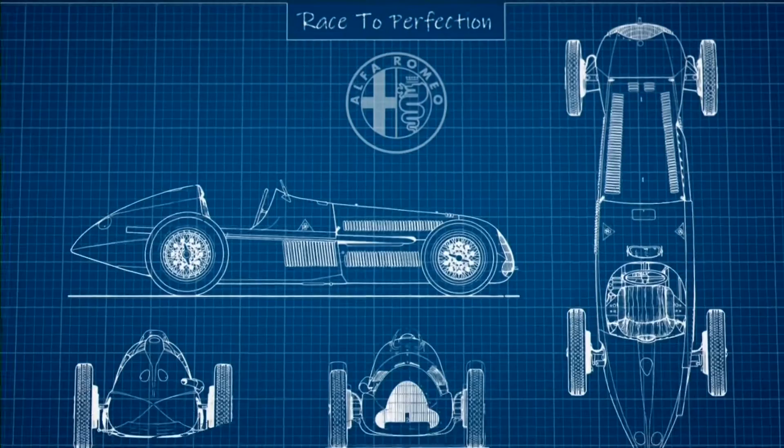From Italy, we have the Alfa team, almost certain winners, indisputable post-war champions of motor racing, and in the hands of some of Europe's finest drivers, they have swept home to victory after victory.

All the 50s cars, the Alfas and Maseratis of that period, were iconic for me. Just the shape - I mean, we all had an Alfetta dinky toy, and I just loved the cars from that era. Those early cars had no comprehension of aerodynamics, so they were very much mechanical devices.

And some strange rules. I mean, we have a minimum weight limit - they had a maximum weight limit, which seems crazy.

The people that drew those cars, the draftsmen if you like, had a real empathy for shape. The grills weren't just openings with some mesh in them - they were always interesting, and they fitted the rest of the car. The shape of the tail didn't really have to be like that from an aerodynamic point of view. So I find that period fascinating.

I often think with Italian Grand Prix cars, they all owe a bit to Bernini, the sculptor. Something about Italian Grand Prix cars - they always look different, and they are different. They are works of art in themselves.

There is colour everywhere as the cars stand wheel to wheel awaiting the warming up lap. The red of Italy, blue of France, yellow of Belgium, green of Britain - they all blend beneath the fluttering flags of competing nations to give an air of pageantry unequalled in any sport. Having made the fastest time in practice, the Alfa drivers were all in the front line.

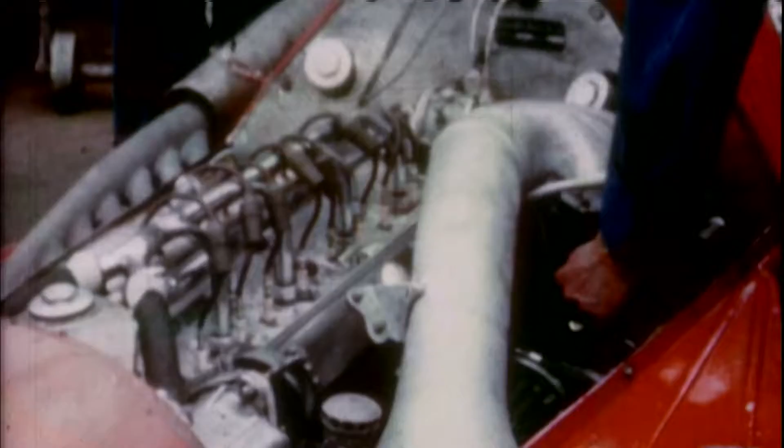It's a remarkable bit of kit. It ended up getting 420 horsepower out of 1.5 litres, and there was nothing that would stop it.

Watch the driver's techniques and observe the obviously superior road holding and acceleration of the Alfa cars as they four-wheel drift round this corner. Now, Farina seemed to have the knack of driving the car, the Alfetta, quite smoothly.

The race was a walkaway for the Alfa Romeos. Farina, number 2, was first, followed home by Fagioli, number 3. The winner's average speed was 90.95 miles an hour - a very fine driving feat, well worthy of the laurels. His English also rose to the occasion: I am very glad to have won the Grand Prix.

The Alfetta took a whole nation's hopes after World War II to the fruition of 2 world championships in the same car, by development and research.

Fangio, destined to become the 1951 champion driver of Europe, refreshes himself with a well-earned drink.

Because there were no challengers to the Alfetta, the 159, they decided that for 1952 the world championship would be run for Formula 2 cars. The car was the Ferrari 500, i.e. 500cc per cylinder, four-cylinder engine, 2 litres, Formula 2 car.

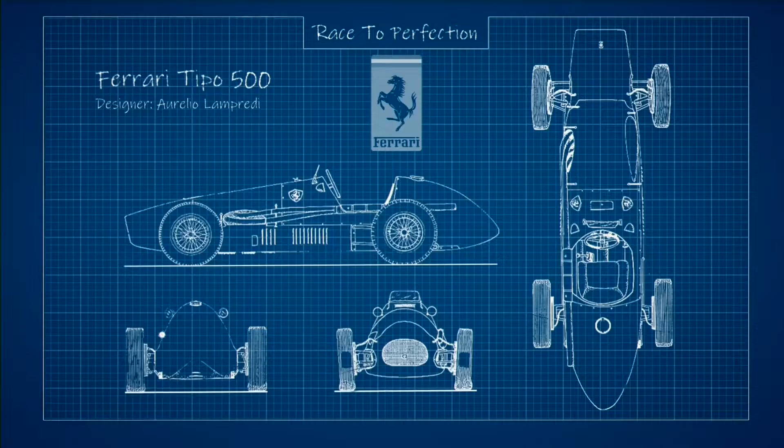Ferrari was really in his element there because that little four-cylinder engine of his was completely bulletproof. And he had Alberto Ascari, the late Antonio Ascari's son, and the man just flew brilliantly in his Ferrari 500. In fact, I think he won 9 Grand Prix on the trot.

And to Alberto Ascari, a further Grand Prix victory - a victory which was to confirm him champion of the world a second time.

My inspiration was definitely Alberto Ascari. Speaking even the last couple of years, as late as a few years ago, even to Stirling, I was saying, going back - and he knows how important they've been to my formative years.

It was a duel all the way between Ferraris and Maseratis, but Alberto Ascari, number 5, the 34-year-old Italian and world's champion driver, took the lead and held it in a Ferrari. A terrific performance by a great driver.

There is a magical thing about Ferrari. Ask any amateur racer in the world if they'd like to go and race a Ferrari somewhere, and the answer is immediately yes. There's something about Ferrari - it's probably the best brand name in the world, must be in the top 3, surely.

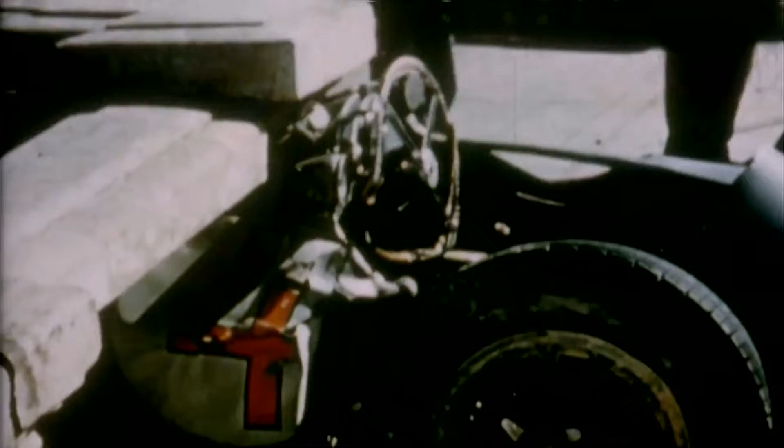If you spun the car, you are immediately in the lap of the gods, because whether you finished up against a tree or a curb or a brick wall would be out of your hands. Flames reach up in the sky at Abbey Curve, where Brooks' BRM was overturned, throwing its driver clear.

Fangio went into the lead to finish magnificently at an average of 98.65.

Well, the Lancia D50 was a very brave program that Lancia instigated. It's a V8 2.5-litre engine, and the Ferrari version of that car, the D50A, was a very well-sorted car. I've raced one of those. It's a beauty, a really, really lovely machine, and I raced it at Goodwood 2 or 3 times.

In 1956, Fangio demonstrates his mastery of a young man's sport. There seemed to be no way to stop Fangio winning motor races, but out in Cuba, not even being kidnapped and held until too late to race disturbed the calm serenity of Fangio, now champion driver of the world for the 4th time.

People talk about the Lotus 49 being the first car to use the stressed engine, but as we know, it wasn't, because the D50 Lancia got there first. And for me, that's the clever car.

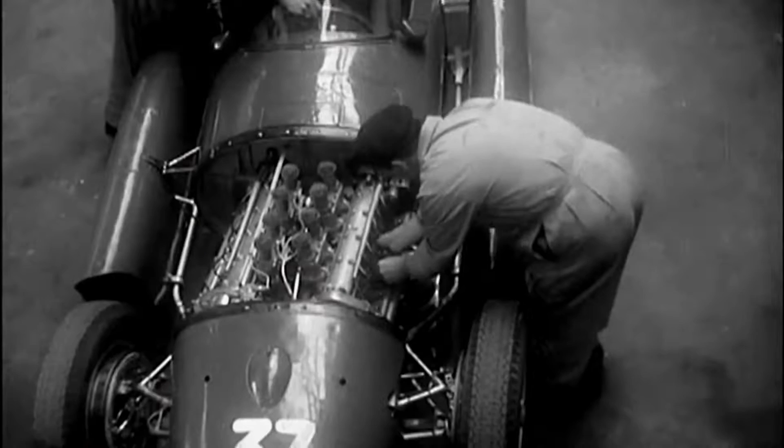I drove the early one, which just has 2 exhaust pipes coming out of 4 cylinders each side. But the later car, the Ferrari version, those 4 pipes went into 2 pipes with megaphones. I had to put in 2 earplugs and push them until they met in the middle to try and do something about it. It's a great joy to drive those cars today in more or less the same setup that they had when they were new.

I sat in that Lancia D50A and I thought, wow, this is exactly how Fangio had it. The engine and gearbox had come out of Ferrari's junkyard down at Maranello. They found about 5 engines and 6 or 7 gearboxes, and they were going to be sold to the scrap man. This was the most extraordinary thing of all. The scrap man was coming that afternoon to take them all away.

In my opinion, if Lancia had had the financial resource that Mercedes had in 1954, nobody would have seen where that thing went. It would have been gone. Fangio in 2nd place is guaranteed the World Championship for the 4th time, but this was Moss's finest hour in a season of magnificent motor racing.

Well, I'd been racing quite a bit, and what I wanted to do was to find an English car, and there hadn't been an English car at all. Nobody thought, or a lot of people didn't think it was even possible, that there was such an Italian stranglehold on Formula One success. And of course you had Mercedes-Benz in there as well. These people simply couldn't be beaten by a British car.

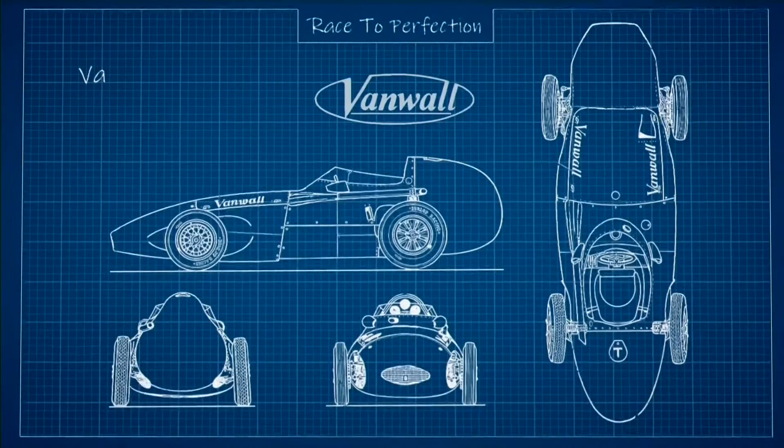The Vanwalls, resplendent in their British racing green, are manoeuvred into their positions comfortingly near the front of the red machines from Italy. When you look at the Vanwall team, what you could say is it grew out of Tony Vandervell's impatience with the way the BRM project was going. So he said, right, if they won't do it the way I believe, I'll do it myself. I'm going to build a car, I'm going to do this, so I rather like that.

By 1956, he employed this upcoming guy to do the chassis called Colin Chapman, who would have quite a stellar career subsequently, and Frank Costin to look after the aerodynamics. It was Colin then that suggested they should speak to Frank and see if he would do an aerodynamic body for him. And of course, the Vanwall looked anything but like any other Formula One car.

Costin and Chapman worked together to put the Norton engine that Vandervell had created into this super streamlined car, which we have an example of behind. It was a beautiful car, completely redefined the way the cars of the time looked.

So by 1957, Stirling was part of the lineup together with Tony Brooks and a brilliant upcoming young driver called Stuart Lewis-Evans. They complemented each other very, very well.

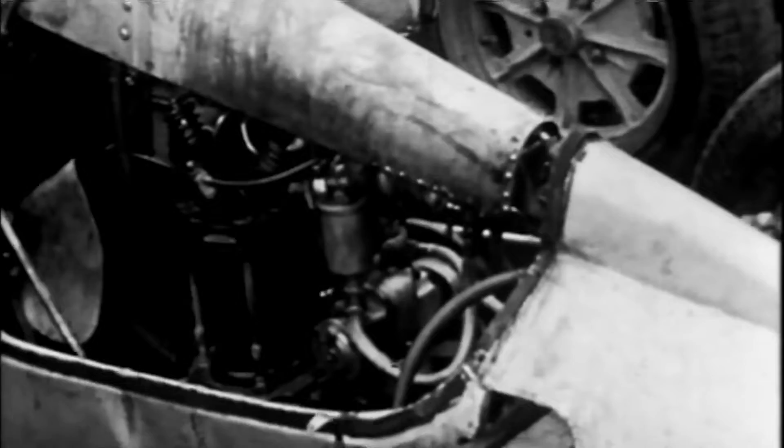If you've got this list, you've got Vanwall and then you've got Cooper, because Cooper were next in line. John and Charles Cooper took hold of a Fiat Topolino, removed the front and rear suspension, grafted them onto a very simple but fairly rigid space frame, put a single-cylinder JA Prestwich motorcycle 500cc engine in the back, and anybody capable of fitting into this could drive it.

Almost by happenstance, they put the engine in the back. A lot of people thought that was because of the success of the Auto Union before the war, but it was more a matter of if you put the engine at the back, you could drive it by chain on the rear axle, so you didn't need a gearbox. Very clever, and absolutely typical of the pragmatic engineering approach that Charles and John brought to the production of their cars.

I think it's fair to say the Cooper 500cc cars brought affordable motor racing to the masses after the Second World War. They had some luminaries of the future driving them, such as Ken Tyrrell and Bernie Ecclestone, and also a very quick upcoming guy called Stirling Moss.

Gradually, they began to evolve. They figured out that putting the engine behind the driver had a lot of advantages in terms of lightness, weight distribution, and handling balance. They began with smaller Coventry Climax engines and gradually got bigger and bigger, to the point where they could have a 1.9 litre and actually do a little Formula One car.

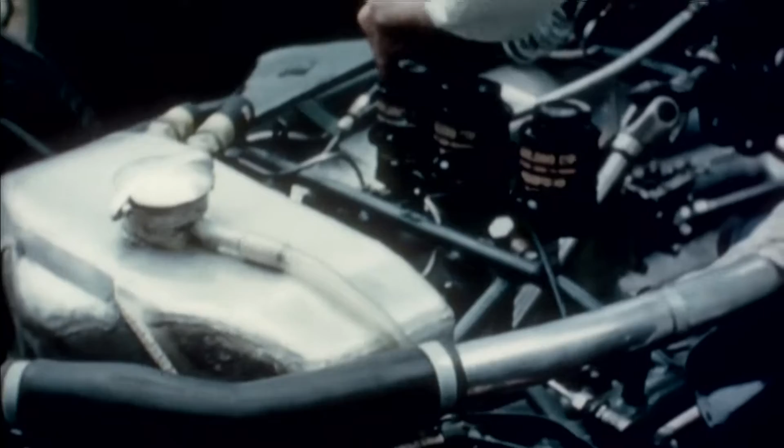Then, the most extraordinary thing: 1958, the Cooper Type 43 is entered by Rob Walker into the Argentine Grand Prix. Rob Walker was my patron, and it meant he supplied the car and everything else, and I supplied the talent to drive it, so it was a wonderful team.

And he wins the Argentine Grand Prix in a rear-engine car. Everybody looked at everybody else and thought, maybe there's more to this rear-engine thing than we see.

I went to see the Cooper Car Company when I got to England, and luckily I got on very well with John Cooper, and finished up driving for him and working for him, and it was a great era.

Number 3 was the winner, the Cooper driven by Jack Brabham. A mighty good omen for British cars this season.

It was really in 1959 with Jack Brabham where they really began to strike it. Jack won that year's title, so they won both the World Championship for drivers, first time for an Australian, and the World Championship for constructors, the second year in a row that a British constructor had won.

He was there at the very beginning, in a sense, of when they started to move towards being real competitors in Formula One. And, you know, Dad was in the workshop, he would build the car.

Our big problem in those days, when we first started, was that there were no gearboxes for rear-engine cars, so we had to make our own. They did a jolly good blacksmith's job building this car, and it was very, very easy to drive, really, with no vices. You could drive a Cooper and have the back hanging out, which is the last thing you'd be doing with a Lotus.

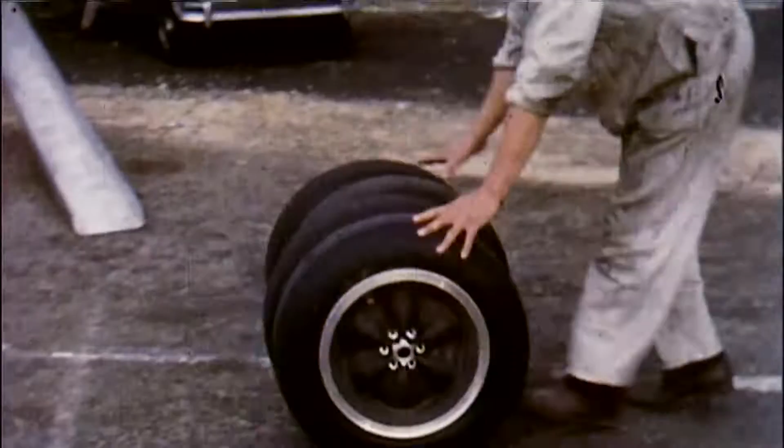Another name that Britain may be proud of, and the man who made it so, John Cooper. From 500cc racing for fun to the Formula One World Championship, the Cooper team has always embodied the finest spirit of British racing. The variety of cars was enormous.

The type of cars, and particularly engines - engines were a very strong aspect back then, with all sorts of configurations. And yeah, they were pretty brave guys as well that drove them.

We had enormous pleasure, we had enormous upsets. We had bad times and good times. It was a pretty good life, I can tell you. I can't think of any other life that would compare, actually.

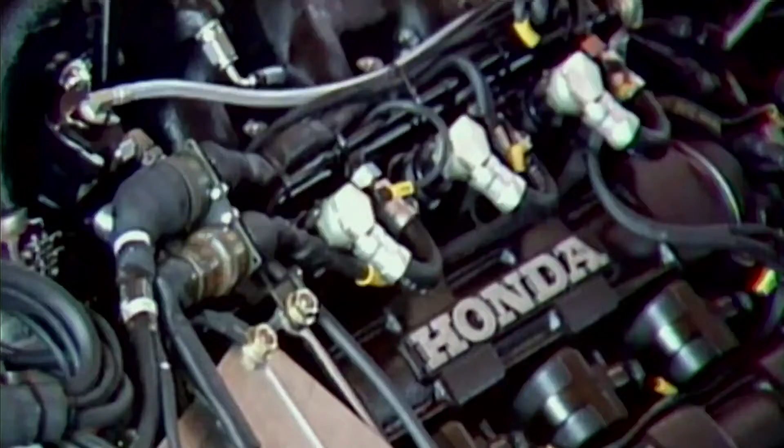The MP4/4 was very much a committee car, primarily conceived by Steve Nichols and Alan Jenkins, supplemented by some of Gordon Murray's thinking. But I don't think anyone could claim to be the exclusive designer of that car.

The drivers would think, it's my car, I drive it. And Ron would think, it's my car, I own it. And the designers think, it's my car, I designed it. And the mechanics think, it's my car, I screwed it together.

Ron Dennis was the very first of the team owners and managers to see the importance of a good designer. My attitude towards things is always trying to just make the best possible car. Use the brain power available, use the rules, use all your resources and components to just make the best possible car.

The starting point really was to talk to the drivers. They were our sensors on the car, to really know what was happening and what was needed. So I talked to the drivers and asked them, what do you need to go faster? What's slowing you down? And they came up with several factors.

I outlined maybe 7 factors that they had mentioned and tried to address each one to make things a little better. For example, they thought the car rolled a little too much, so we raised the roll center slightly to reduce the roll.

They didn't think the front felt completely connected to the rear, and some of the settings would get lost on their way from front to rear. So we made the monocoque much stiffer, which helped that problem.

It was quite clear that we were not going to be serious competitors to Alain Prost and Ayrton Senna with a Honda engine in the McLaren, and we deliberately decided to focus on technology.

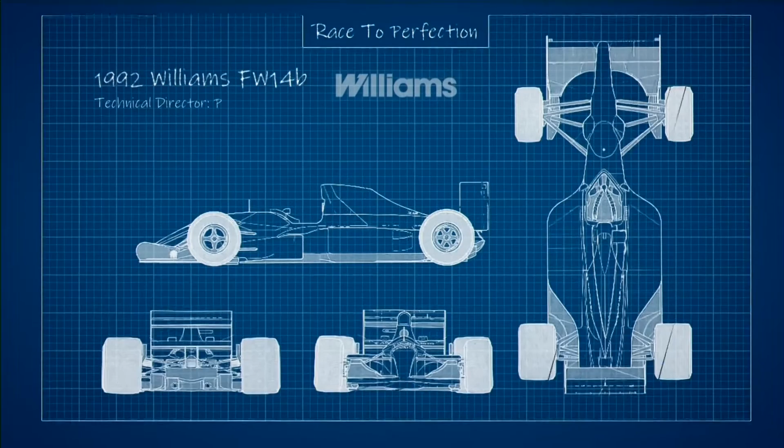The history of active suspension at Williams started before my time, so really it was Frank Dernie who was the champion of that project from the start. My objective with active suspension was just to keep the aero platform stable.

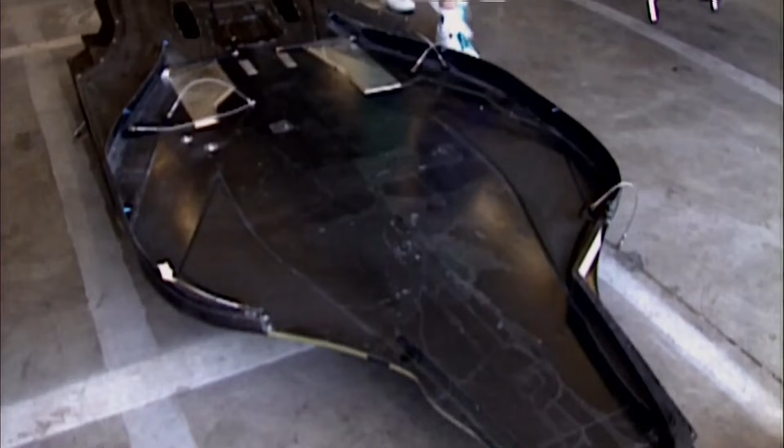People thought if the bottom was flat, there wouldn't be any ground effect. But in actual fact, with a flat bottom, you just get ground effect which is massively variant depending on the height above the ground. There are certainly a lot of conditions in a Formula One car where you cannot get the suspension ideal for all of them, and active suspension is definitely the thing to achieve that.

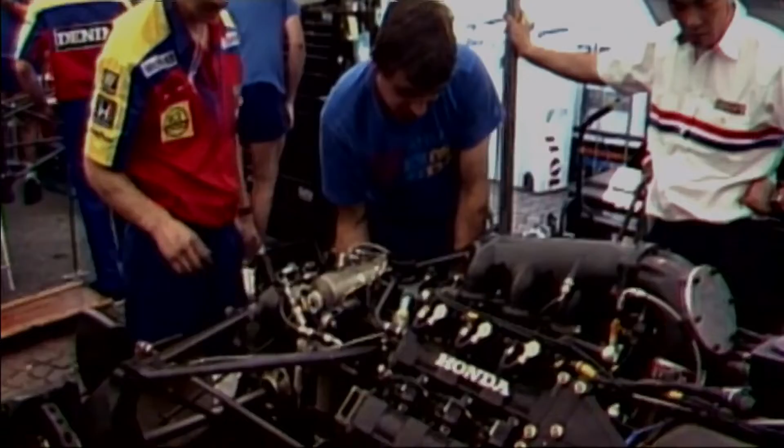Frank came to add, I think, some more flair really to the company, someone whose role it was to think about the car and how it developed and the design of the car.

Patrick at first thought it probably, from what we'd seen, wasn't worth doing. But then we had a chap came along who worked for Lucas, who'd made a system for an ambulance, the idea being to make the ambulance more comfortable. Patrick thought that might have some potential, so he gave it to me, and we made a prototype which ran on an FW09.

We developed ours from an Automotive Products system that was developed 15 years or so ago, and took one basic idea from that and developed it. So our system is probably more hydraulic and less electronic.

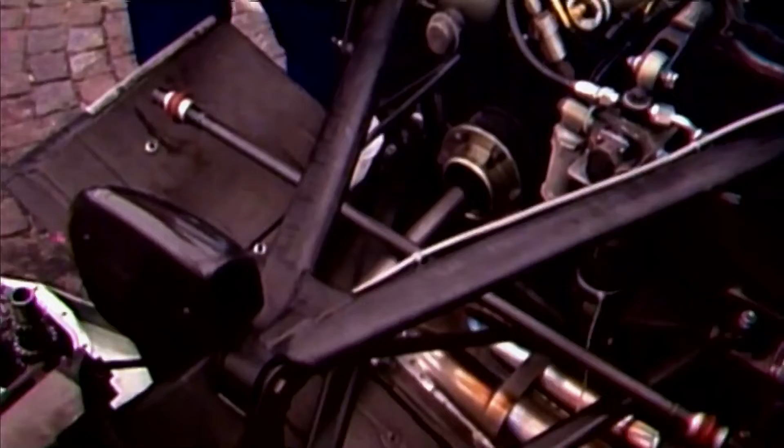Frank Dernie employed me for the active suspension project. They realised they needed more effort, more expertise. They actually raced a system for one race towards the end of '87, I think, at Monza. We did about 4,500 kilometers, from the beginning of the project to now, and I think I done most of these kilometers, and now everything's going all right.

The car had blistered tyres, the whole bit. He was not going to be giving up. He was going to win that race. And Nigel had not wanted to run the Active because he wasn't at all impressed with the idea of Active. But once we'd won a race with it, he wanted one.

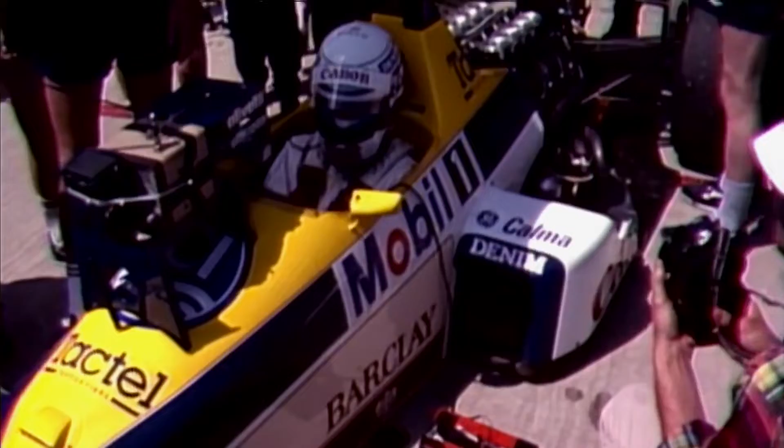We then did our best for the system we raced in 1988. It really wasn't in the shape it should have been. We really should have taken a year or two before committing to race. We built it on the FW12 and had all sorts of problems. It was still good, but we couldn't get it working.

I think at Silverstone, Patrick was so frustrated with the whole thing, he just said, right, that's it. So in our office, that was quite a gloomy day, even though, in all honesty, we realised it was the right thing and that actually we needed that space to come back with a much better prepared system. It was also very clear to me that we were not making progress aerodynamically.

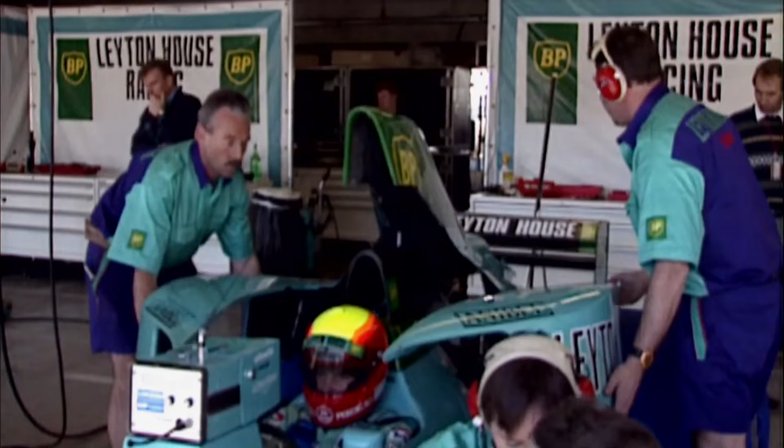And then I think at Leyton House, Simon Kidd sacked Adrian Newey. So I gave Adrian a call and said, why don't you come and join us? And Adrian did. So basically, if you look at the FW14, its external geometry, the body and everything was pure Leyton House from the year before, but with better engineering systems on the car.

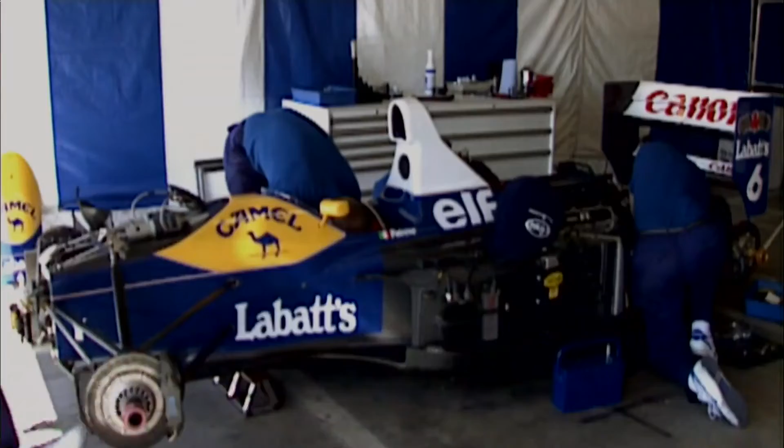There was a huge amount of scepticism as to what were we doing. Wasn't this all a bit of a waste of time? I remember late into 1991 where we'd pretty much committed to bringing it to the race car for '92, still having arguments with race engineers about what was the point and whether it would really make the car quicker.

The active car, at first, felt a bit weird because it did actually maintain the ride height so well. But it didn't feel that different. What you're aware of with a passive car was the amount it rose up when the load came off. You just got rid of that problem.

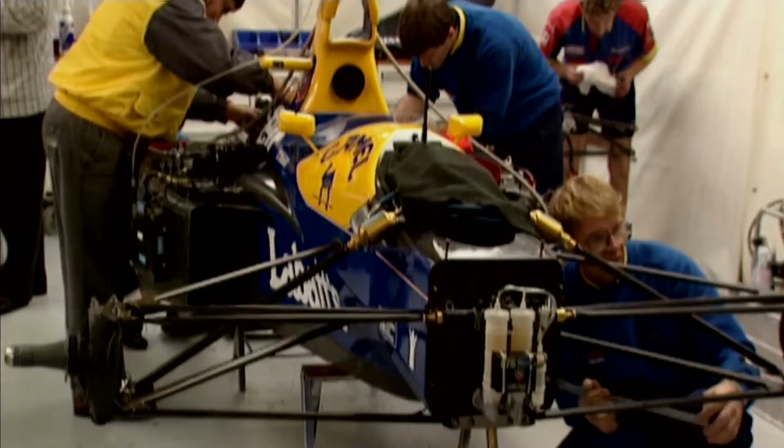In terms of systems, obviously with the active ride, it had an electronic power steering system, and it had at various times anti-lock brakes and various traction control. So it certainly had a lot of systems on it. It was no way, as a car, as complex as the cars are now.

We were playing with really minute ride height control adjustments to front and rear. Attitude control, power steering was brought in, we brought in ABS braking, power-assisted braking, to the point where we had a pedal which didn't move at one point, and then we had traction control. I worked on the early traction control and playing with all that stuff.

It was great fun. You've got Adrian Newey tiptoeing down the corridors, and Patrick Head, and Paddy Lowe, and from my position where my office was, I'd often see them all getting together and I'd think, you know, these three guys, this is going to be a pretty good year for sure.

The greatest moment that I recall was a test at Paul Ricard in December '91, where we had the active car and we also brought along the first version of traction control. At that particular test, we really did start doing some stunning lap times in an absolute sense. I think then we felt, wow, it's all about reliability now. It's just about making this car finish.

We needed to win the championship in 92 because we could have done in 91, but didn't. Senna and I had a most incredible race at the end of 91 in Australia when we had the typhoon, with cars all down the straight and people having accidents every lap. They red flagged it and abandoned the race.